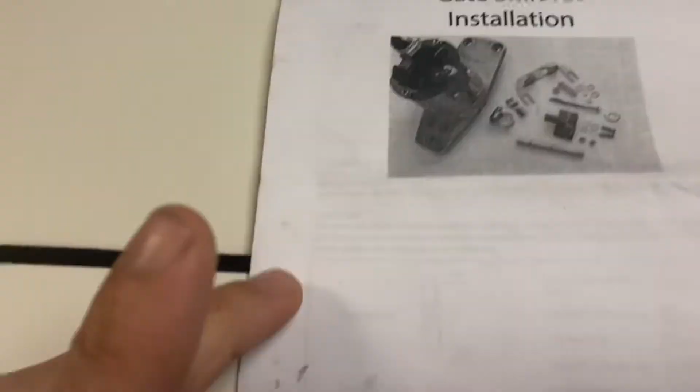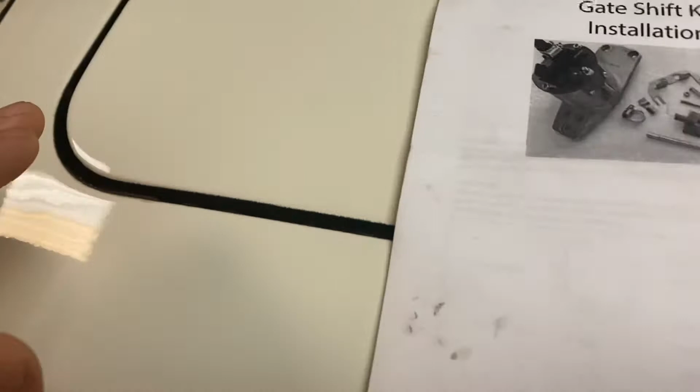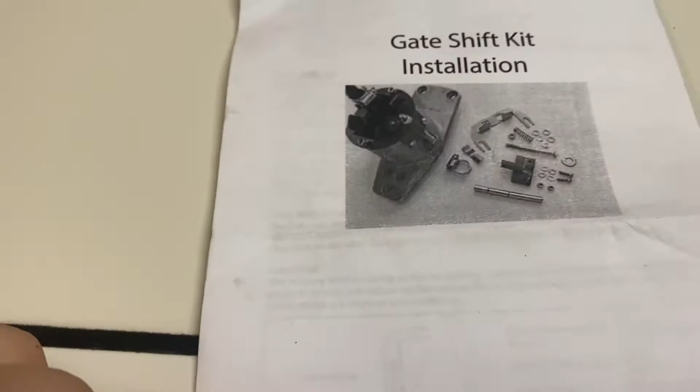So after doing some research, I decided to purchase the Seine, I think that's how you say it, Systems Gate Shift Kit installation set, as opposed to spending about 4 times that amount on the Wevo, which I know is the superior setup. But for now, I think that this little project should be easy enough and help make the shifts more direct on the 911.

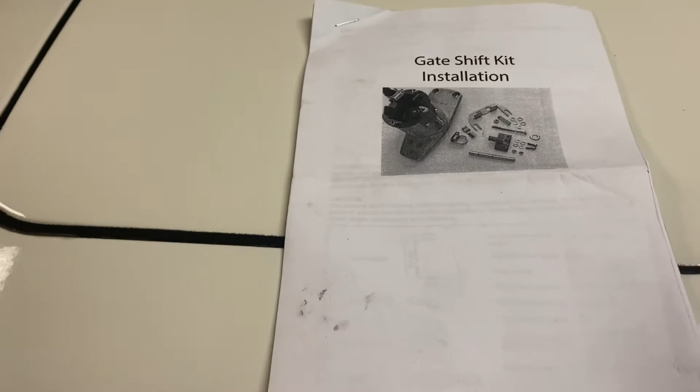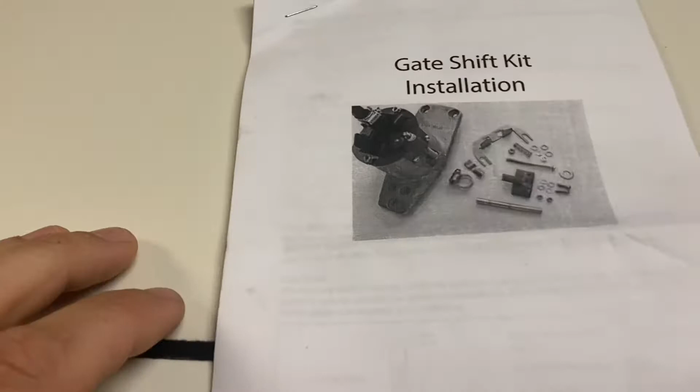My 911 is equipped with a 915 transmission, which is notorious for oddball shifting patterns, including some people that have had issues where they actually blow their motors by shifting down to first gear when they're trying to find third, or second gear when they're trying to find fourth. So this kit here is kind of genius. I can't believe that Porsche didn't do this from the beginning.

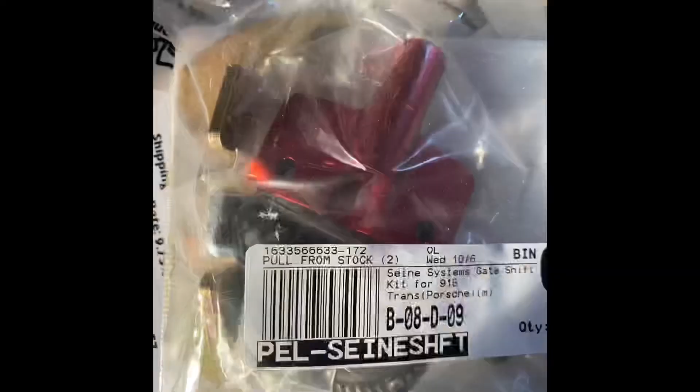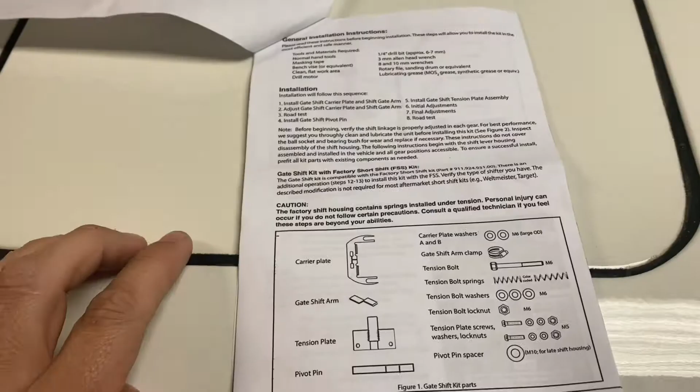So what you get is a couple little bits and pieces and parts in a fancy little plastic bag, and then these instructions that kind of tell you everything that you need. And I didn't read any of this before I got started, so I was a little shocked by some of the stuff that I needed. Luckily I had it, such as a drift and a center punch, and luckily my Dremel had some attachments. But you need some stuff, so just make sure that you're prepared for this project before you get started. You'll see in the video, I also used a bench vise quite a bit.

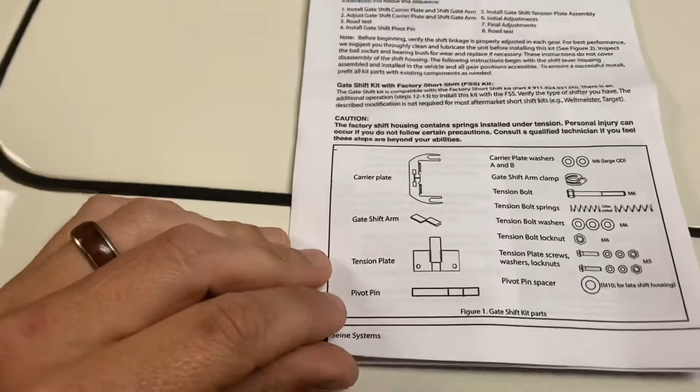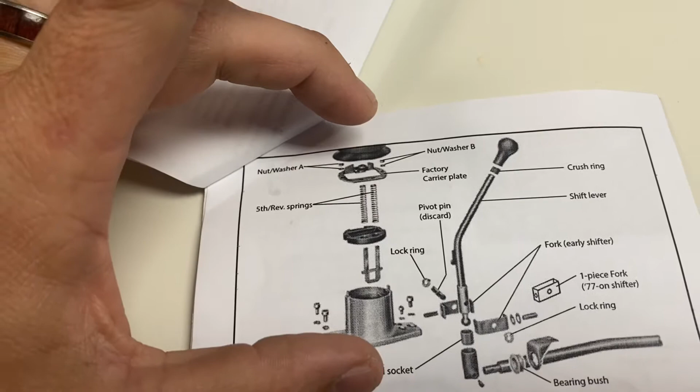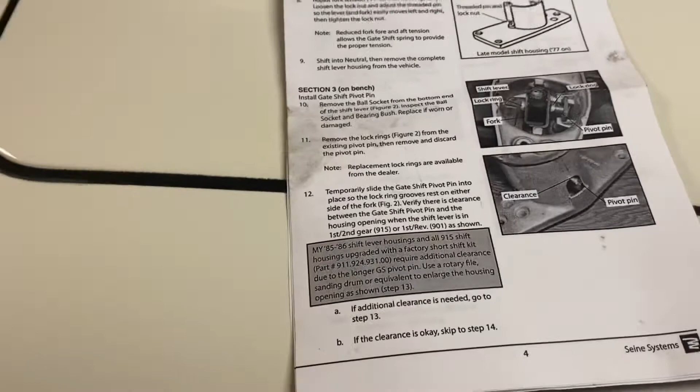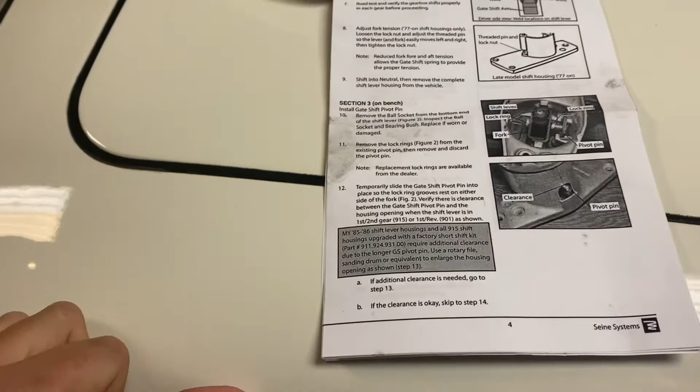So this is kind of what everything looks like. This you can almost ignore, because this section here, you're not tinkering with. You don't open any of that stuff. Everything that you're doing is kind of external, and then sliding in a new pin part. So do some measuring, you really have to do some thinking. So I don't know what Pelican put this installation on their website, but I'd say for the average person, you have to have some tools and you have to be willing to take your time. And there's a lot of trial and error as far as how much clearance do I need for this pin, etc., as you'll see in the video.

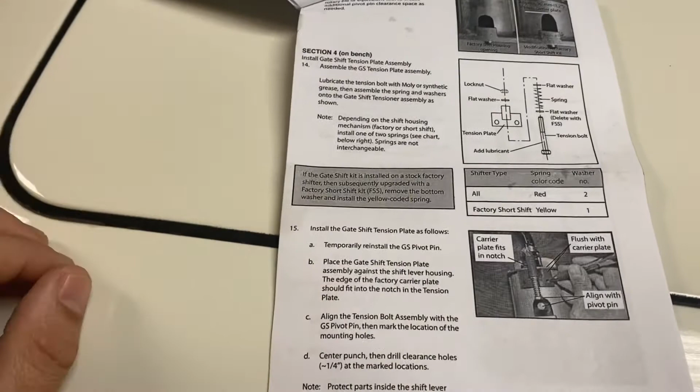So, but the instruction manual's okay. It's got a couple little bits and pieces. You have to keep flipping back and forth to the main page to determine what flat washer it is. Is it an M6 or is it an M5? I don't know, but you have to go back and look. So overall though, pretty easy install, and you're gonna be along for the ride for most of what I do.

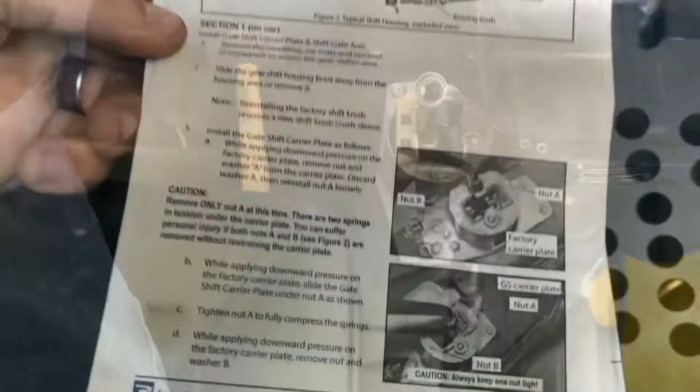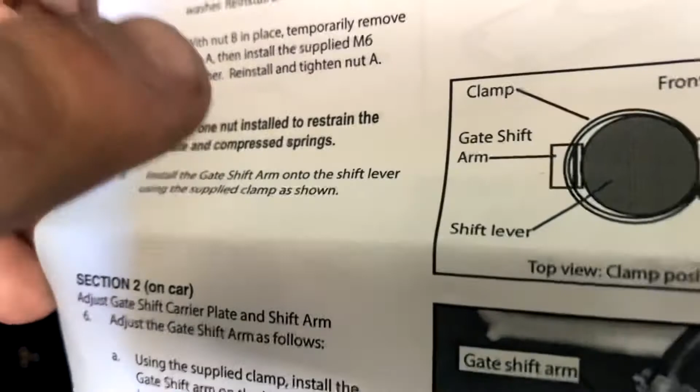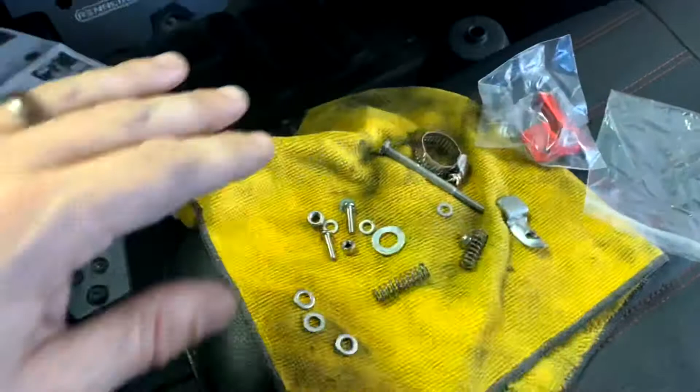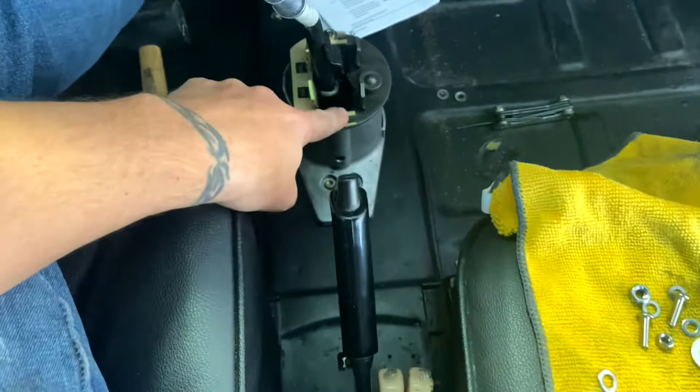All right, so this is our next step right here, putting the gate shift arm on the lever. So basically this is the pile of parts that comes with it. I already used the base plate here, and I also used the washers. You reuse the bolts, the old washers are there. So I guess the next part goes right onto this area over here. And we will give that a shot.

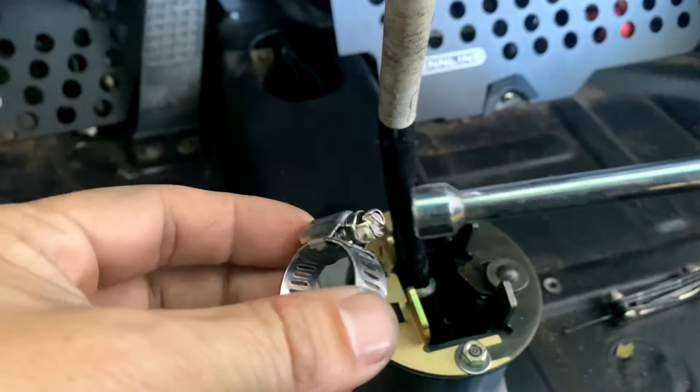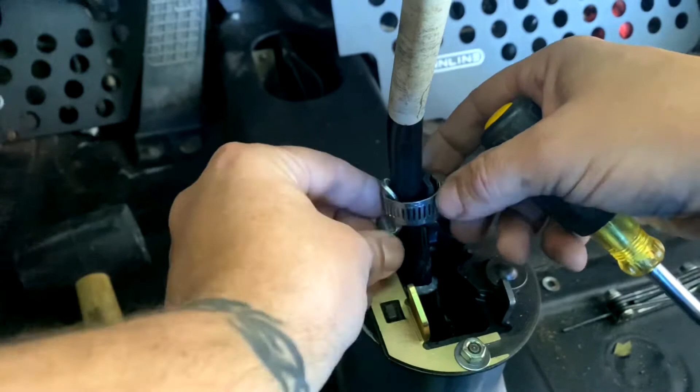All right, so they give you this clamp right here. It's 5/16, and then you've got your gate arm here. So the clamp slides over the end. I've got it in first gear. I don't know if that's what you're supposed to do, but I figured to line it up, that would be easiest. How tight this should be. It does say to end up welding.

I'm gonna move you so I stop smacking the camera.

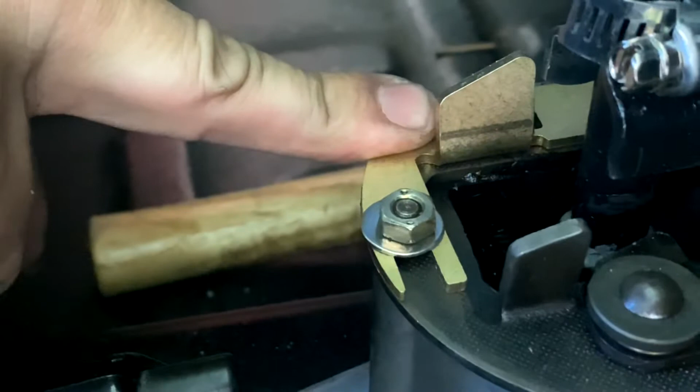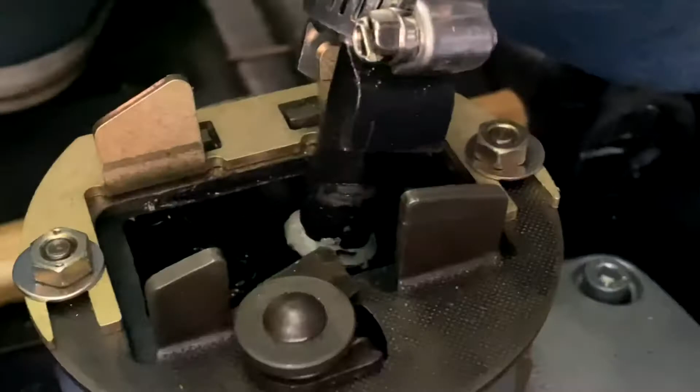So I put this base plate on here, and then lined up this gate, which basically holds it in first, holds it in second, up to neutral, tip over, and then it's right into third. All right, so I'm gonna adjust this out ever so slightly.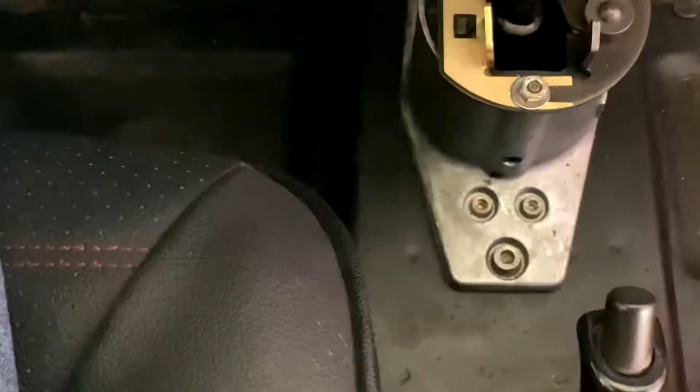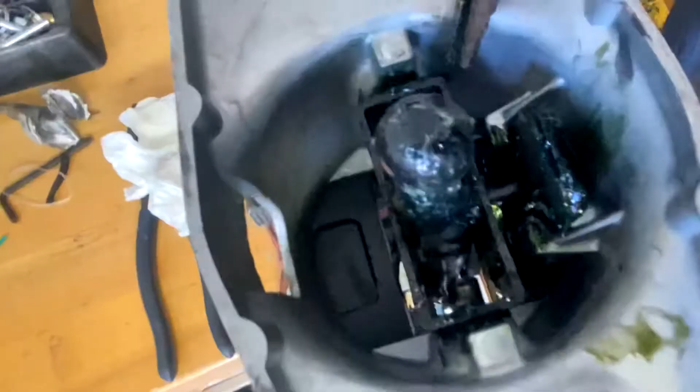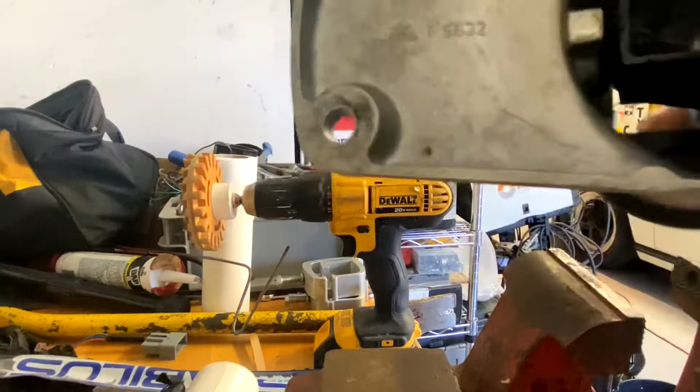All right, so our next move is removing all of them. There's a second lock ring right here, so I'm going to yank that out. This lock pin, I have to pull that out, and then that shifter will probably slide out. Here's the new pivot pin.

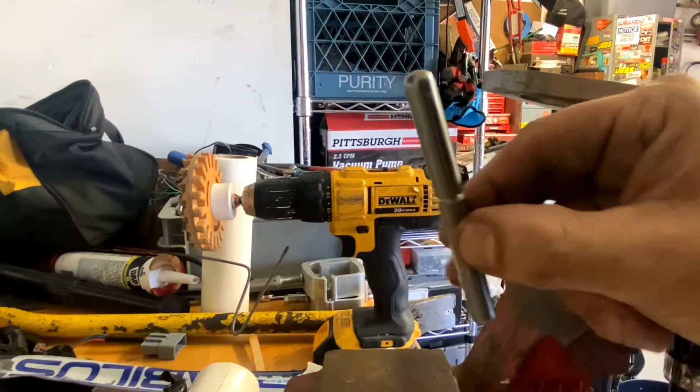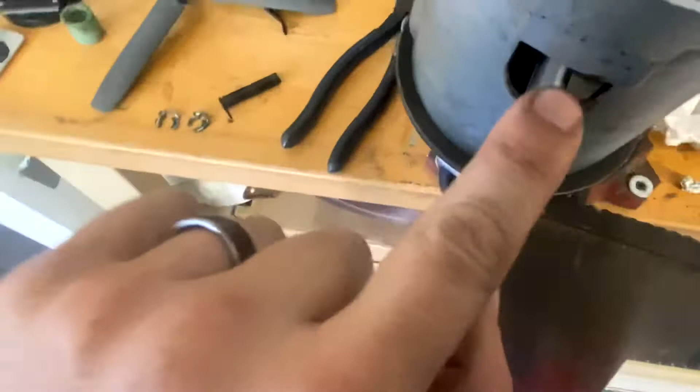All right, so this was a bit of a pill. What you have to do is, it doesn't really say anything about it in the instructions, but what you have to do is push down on this right here, and that will allow you to slide this pivot pin into there. Now what we're gonna do is, in those two grooves, I'm gonna slide these lock rings back in.

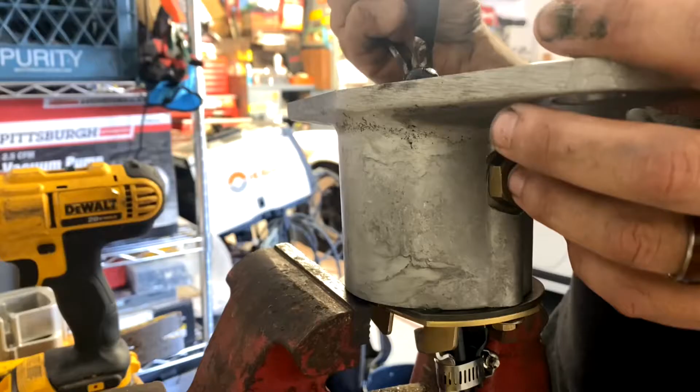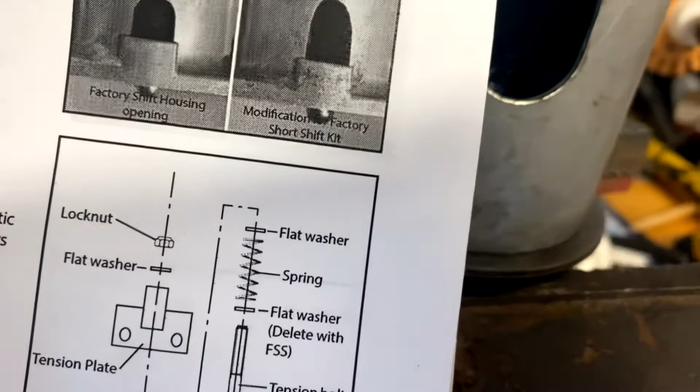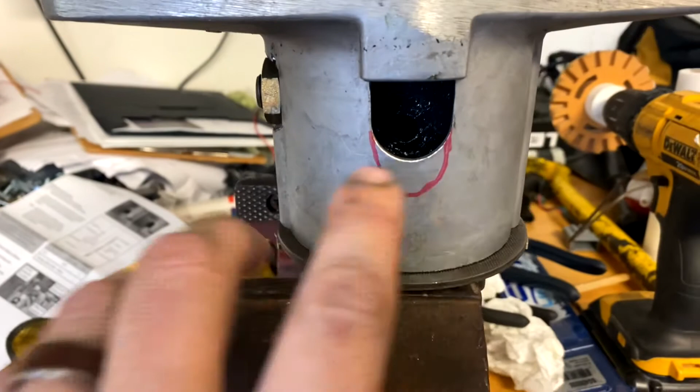Apparently, if you have the issue that I have, you have to elongate that hole about 1.2 inches. So I've got to make this bigger. Wish me luck. All right, so I'm gonna give this a shot. See if that gives us the clearance we need.

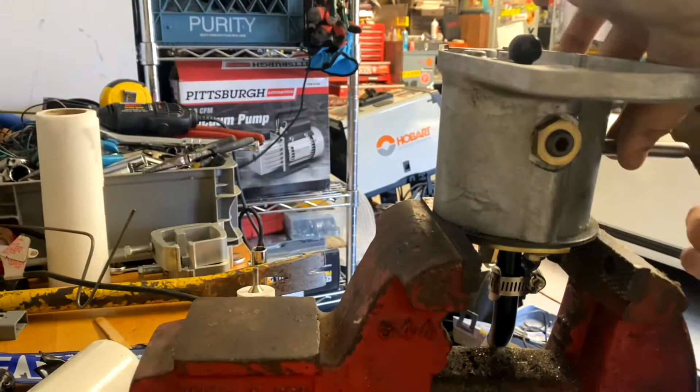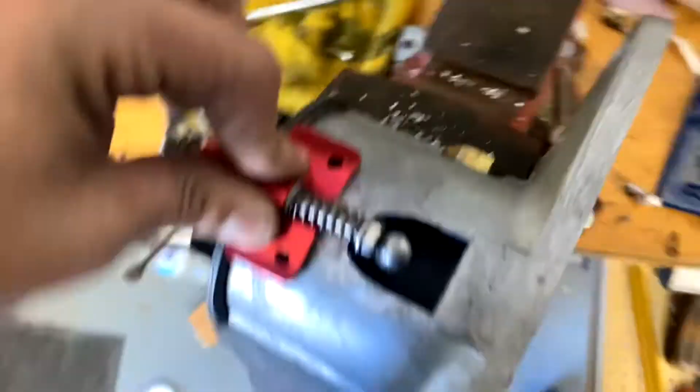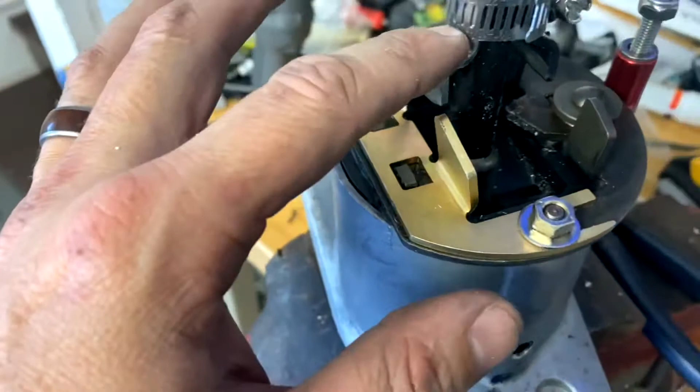So I had to drill these holes for this plate here to rest on that. So then there's a couple little bolts and washers that hold that in place. So that's the next step here. Okay, got that tension piece on there, got the bolts in the bottom there.

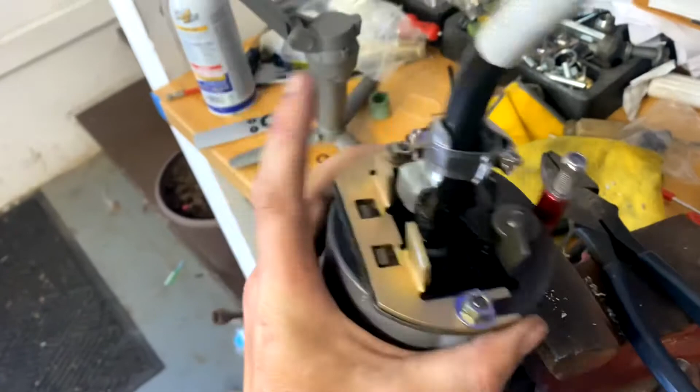So that's basically it. I put the short throw spring in there, which is, I believe, the higher tension of the two. I don't really remember, but I'll give you kind of an overview. So this is now your neutral, how it has a spring back effect, which is super nice. So it always centers in the gate between 2 and 3. So that would be over and reverse. This is centered up and down for 3rd.

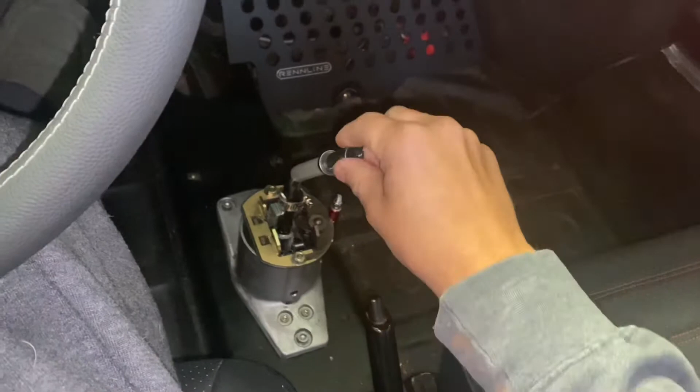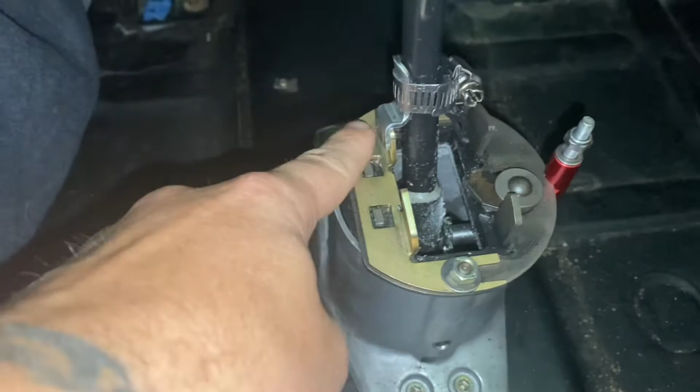So first gear. Now you've got this pin here that kind of makes sure that it's in first. You've got a little bit of clearance. When you go to shift down to 2nd, it's direct. It goes right into 2nd gear, and that spring tension is always pulling against it. So watch this. When I pop it out, it goes right up there. So when you're going up to 3rd from 2, it's just super direct. And then same thing if you were going from 3rd down to 4th, there's no guessing. And then your spring has you right there in the center.

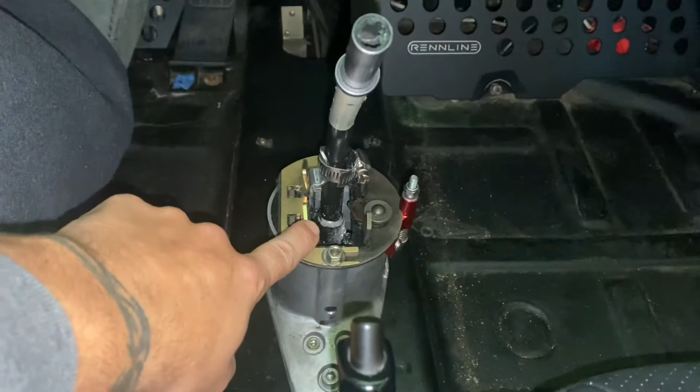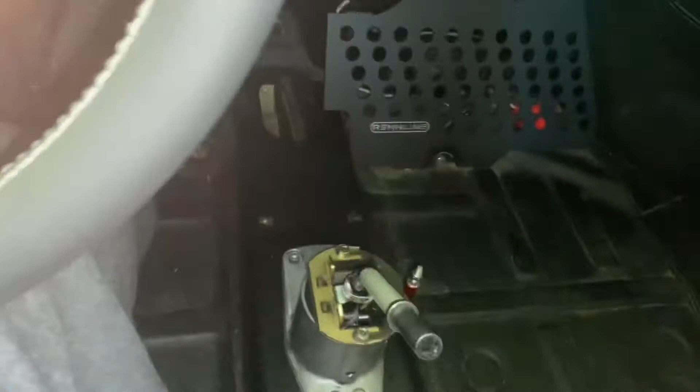So I totally get it. I think that this is a mistake that Porsche made from the get-go, and honestly I can't believe that they didn't solve that in the 15 years that they were running this 915 transmission. So I really feel like this is a genius fix to the problem, and I'm sure it doesn't feel the same way that a G50 feels, but for $150 that is about as direct as I could hope that my shifting and transmission would be. So I did take it out for a spin and checked it out on the road, and I was really impressed and super happy with the install.

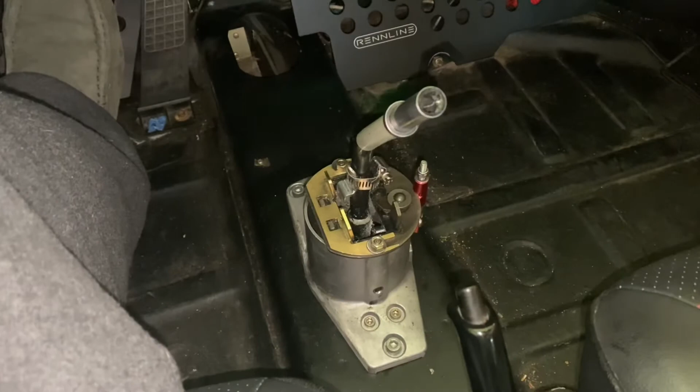The only thing I've got left to do is I'm going to take this clamp off and I'm going to weld this on. They also have a hole, so this plate here, it's covered up by the band right now, but there is a hole there. So if you don't own a welder but you did have a drill, you could probably center punch this and drill a hole through and then bolt that thing to it. I do own a welder, so I've got a nice little Hobart there, and I will be welding mine on. And then, as some of you guys who know me on some of the Facebook groups know, I'm working on a wood shift knob that I'm turning on my lathe for this right now.